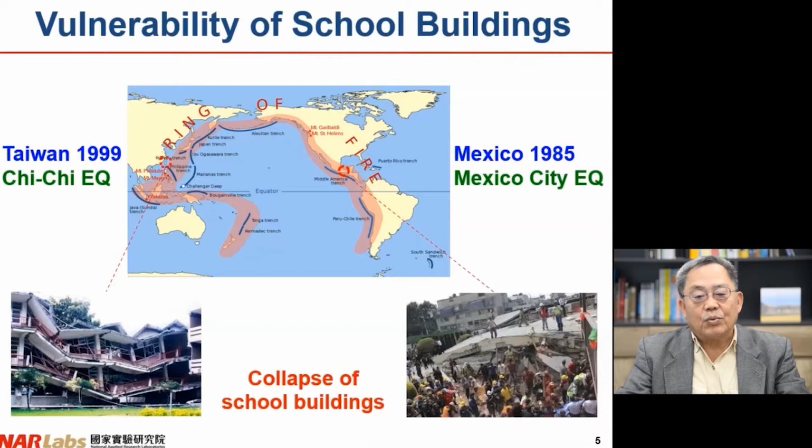So for introduction, as you can see, Mexico and Taiwan are all located in the Ring of Fire. We have big earthquakes, but our schools are quite vulnerable. During earthquake reconnaissance, you can see that we have collapsed school buildings. That's very dangerous, and we have to do something to prevent this tragedy. In Mexico, I believe you already have a very good technology. For example, you can retrofit the school building using post-tension rods. That's a very attractive technology, and therefore we cooperated with Professor Alcocer in the year 2007.

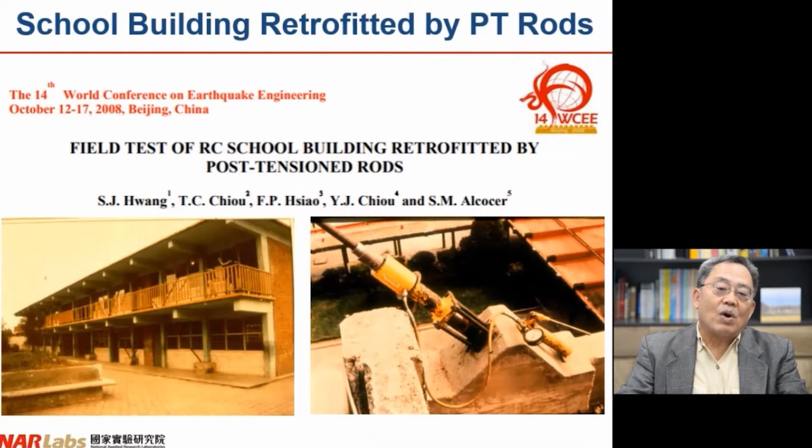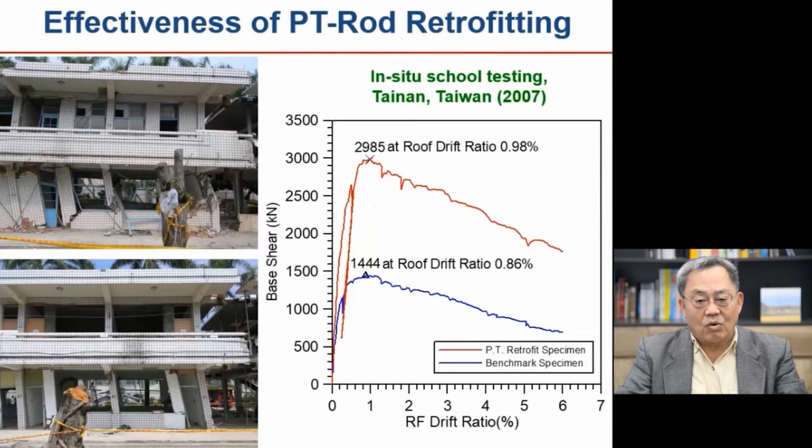So in Taiwan, we have in situ school testing in Tainan, and we have 2 building units. One without retrofitting, here is the curve in blue, but if we retrofit using the post-tension rod, you can see that the strength can be greatly enhanced. So this is a very advanced technology, and I think that Taiwan and Mexico have a strong tie in the long run. So let me introduce the evaluation and retrofitting technology that we have.

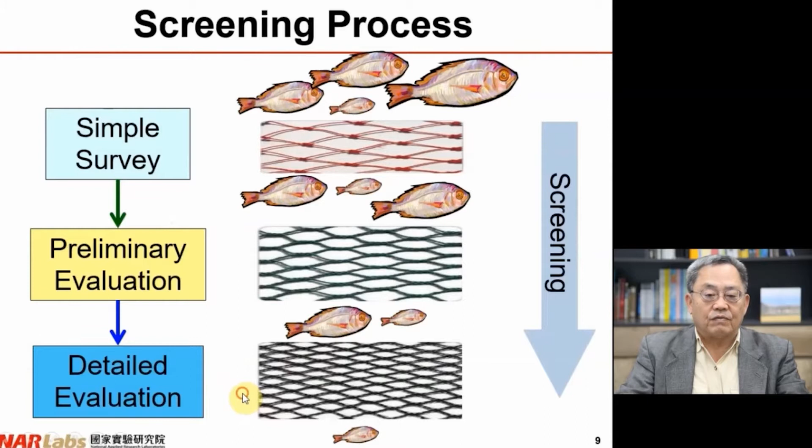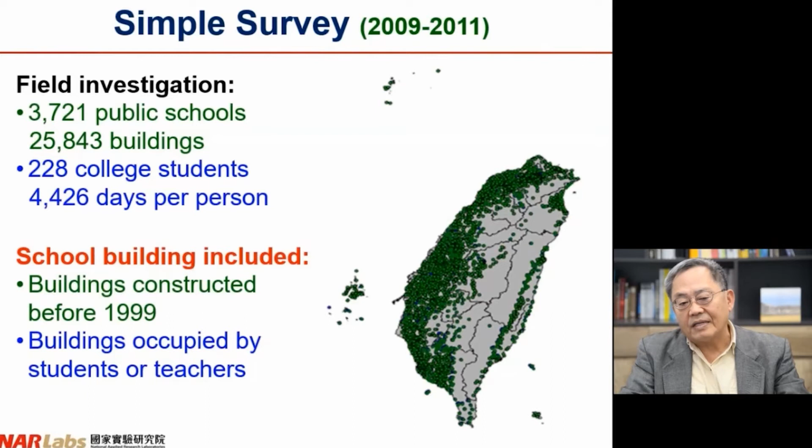Since we have a large volume of schools, we need a screening process. We begin with a simple survey using a very coarse mesh, followed by preliminary evaluation, and then we use the most refined mesh, that's the detailed evaluation, to find the dangerous school buildings for retrofitting. For the simple survey, we invite college students to do a field investigation during the summer and winter vacations. They stop at each site to see all the school buildings. A school building should be included in this project if it was constructed before 1999 and is occupied by students and teachers. Those are the buildings we need to pay special attention to.

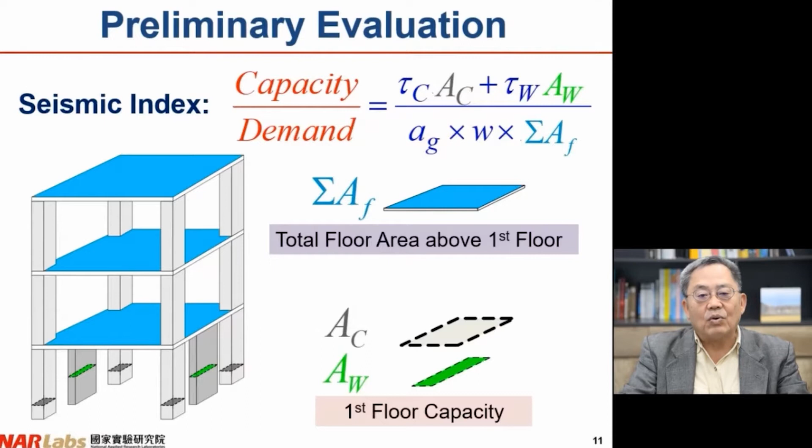For preliminary evaluation, we use the seismic index, that's a capacity to demand ratio. For capacity, we use the column area in the first story times the average column strength, and we also include the first story wall strength. As for demand, we use the site acceleration times the mass. Therefore, we can have a simple index to indicate the priority.

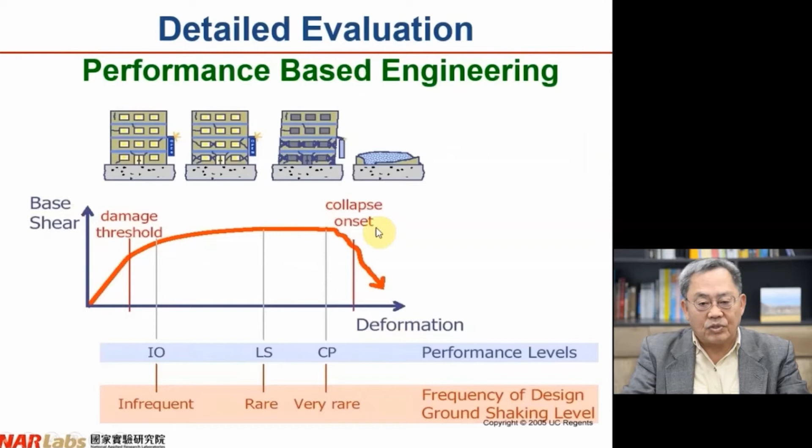And for detailed evaluation, we would like to use performance-based engineering. It means that we have to handle the base shear as well as the lateral deformation. Since we know the deformation, we can understand the damage status more closely. So for this detailed evaluation, we use nonlinear static analysis technology. So we developed the pushover analysis.

First, we find out the capacity curve, that's the base shear versus roof displacement. And then we convert it into a capacity spectrum using the single degree inverted pendulum. Then by defining the performance point, we can get the performance target ground acceleration, AP. Once we have this value, we can compare it with the code-specified value to see whether or not it's qualified.

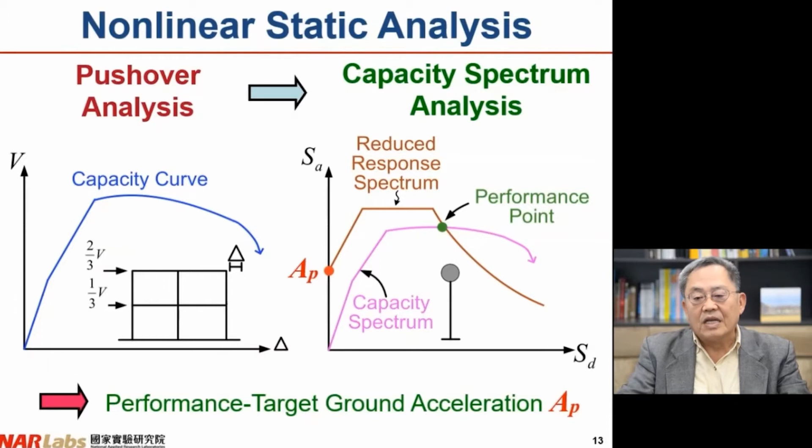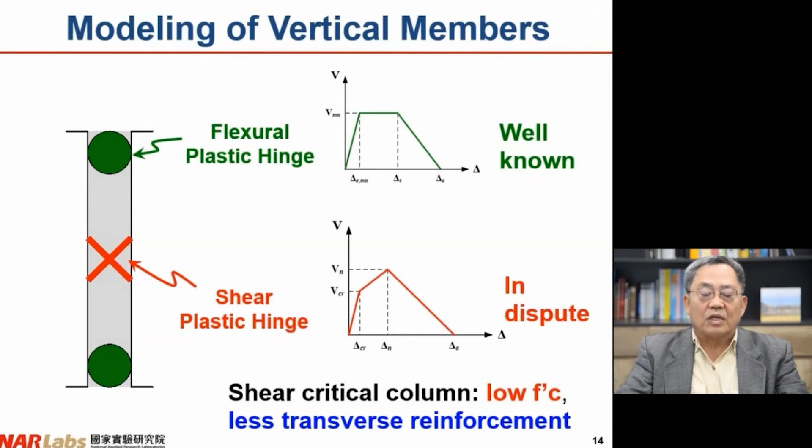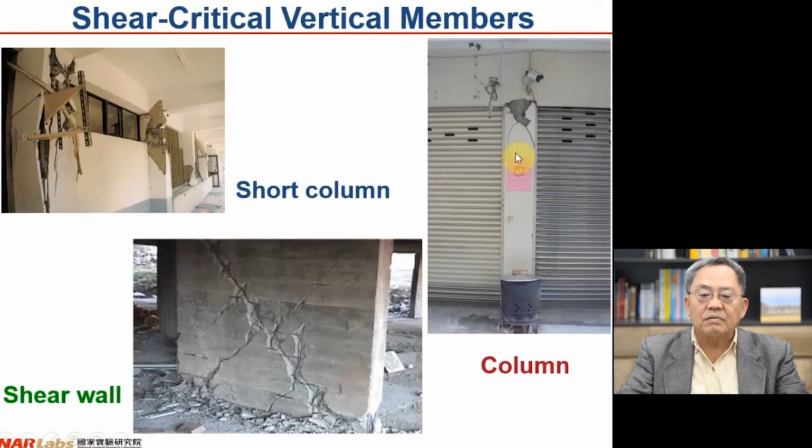But in Taiwan, since our concrete strength is very low, and also most of the school buildings were constructed before the seismic code was available, the school buildings have less transverse reinforcement. So low concrete strength and less transverse reinforcement make all the columns shear critical columns. So we have to resolve the shear behavior before we can use our analytical method. In the reconnaissance in Taiwan, you can see that we have a lot of column failures for short columns, typical columns, and also shear walls subject to shear failure.

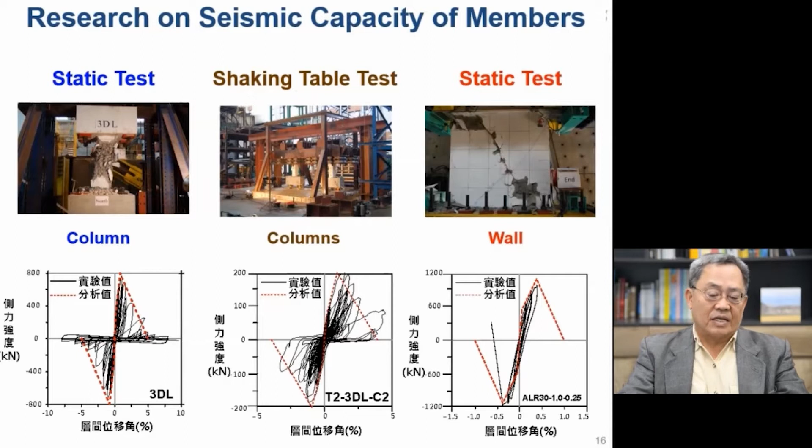So in NCREE, we have a lot of research on the seismic capacity of the members. We use static tests on the strong floor. We also use shaking table tests for the columns as well as the walls. Most important is that we have the measured curves, and we use them to calibrate our analytical model. So for member-wise, that's the way we do it.

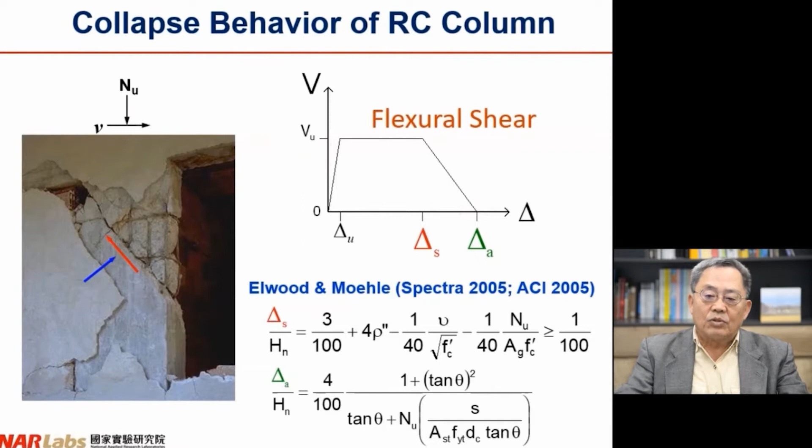For flexure-shear behavior, most important is the collapse, and how to define it. As shown in the left photo, you can see a major shear crack occurs. That's a shear failure that occurred at the lateral displacement of delta S. But at that time, the vertical load, NU, can still be maintained. Unless you have a larger lateral displacement, delta A, and we lose the gravity load carrying capacity, that's a collapse. This model was developed by Elwood and Moehle in the year 2005. They are empirical equations, but very useful. So we include this model in our analytical procedure.

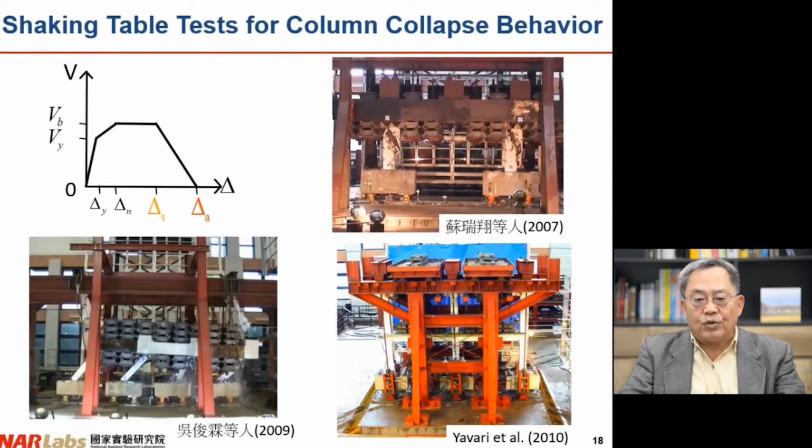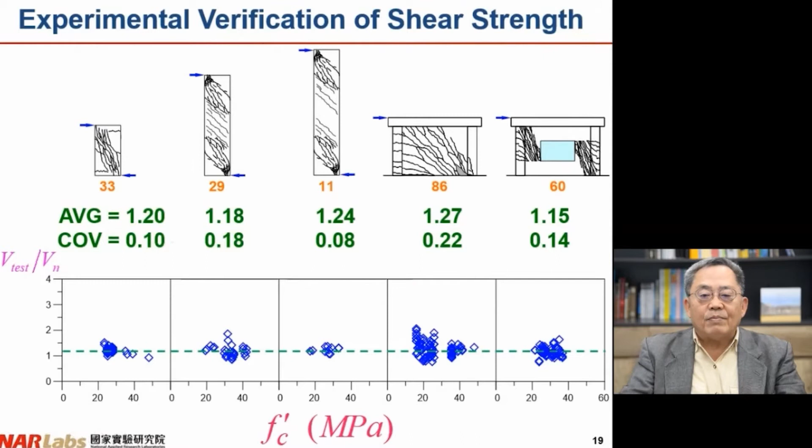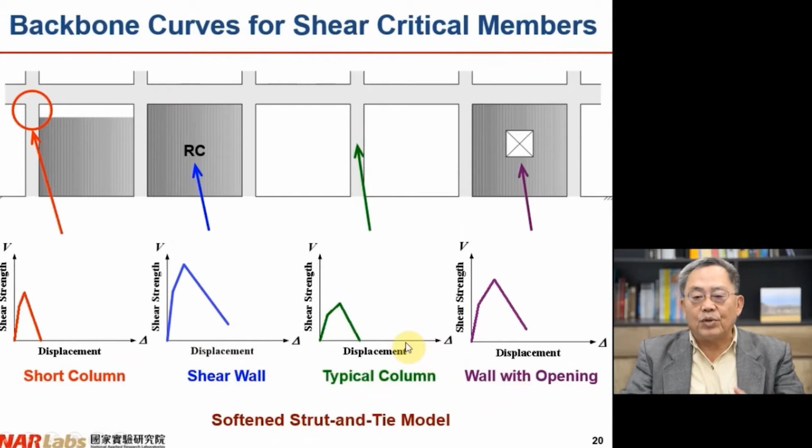So after we establish our member behavior, we try to find out the backbone curve for these shear critical members, such as short columns, shear walls, typical columns, and walls with openings. Once we have this lateral load-deflection curve, we can perform our pushover analysis. And then we shift to in-situ school tests.

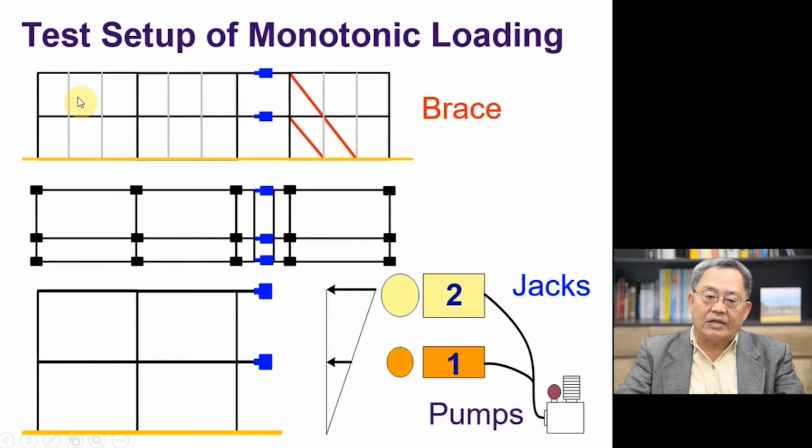Every year in Taiwan, some school buildings are going to be demolished, and then we can perform the test. How to do it? The school building is rectangular in shape, so let's cut it in half. Then we use braces to retrofit the other part as a reaction frame. Then we put the jack in between and jack it, and the weak part becomes the specimen, and we can measure the lateral behavior. Let me show you one example of the pushover test.

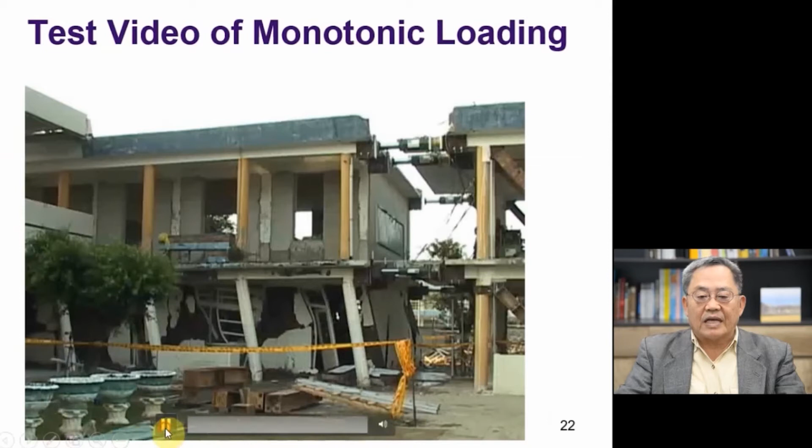Here is the monotonic loading. We push to the very last, and we can see the total collapse of this building. And then we can understand more about the behavior.

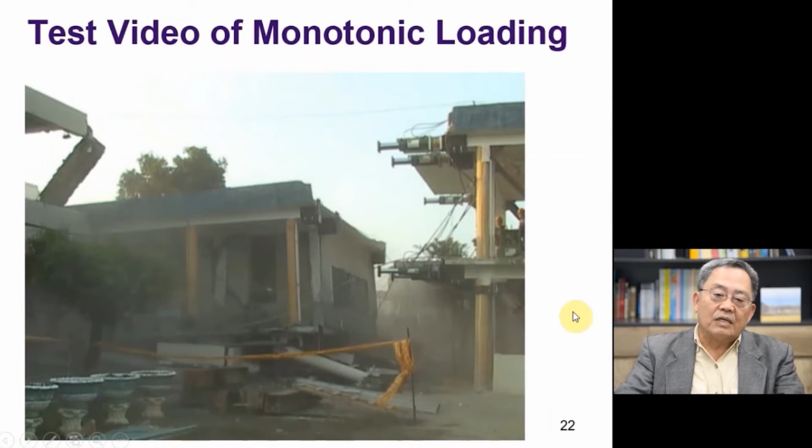And we also perform the pseudodynamic and the cyclic loading test because we want to model more closely the earthquake motion. So for this kind of test, we need the RC reaction wall. So we have to build our own reaction wall. And we use the oil jack actuator from MTS, and we use the post-tension rod. Therefore, we can push and pull back, and we must have a very strong measuring frame to indicate the displacement.

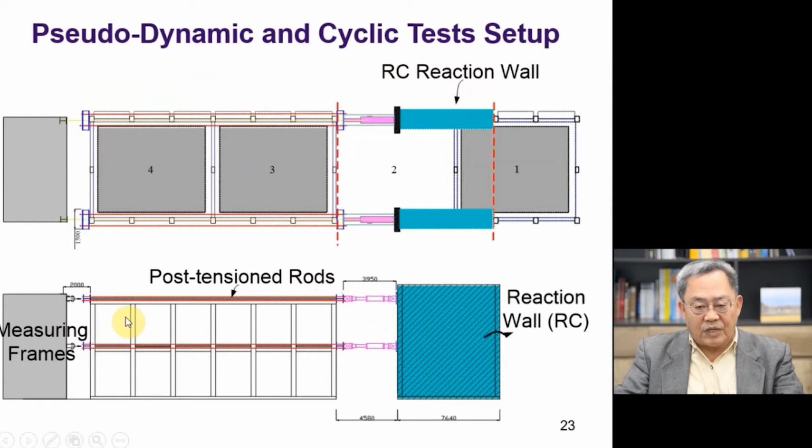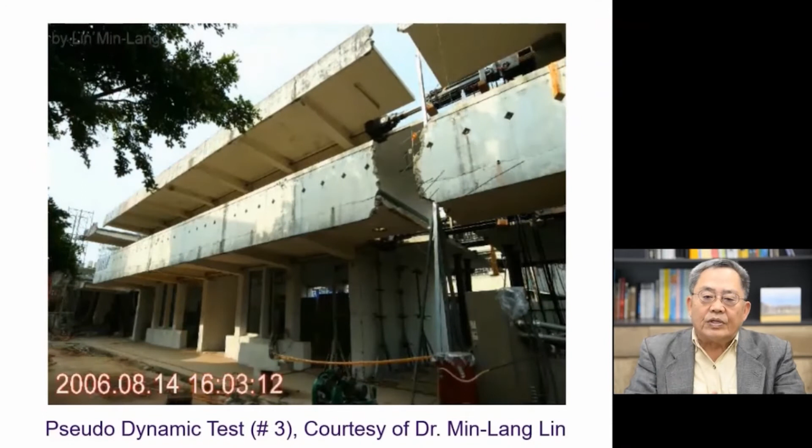So here is an example. That's a pseudo-dynamic test we performed in the year 2006. So you can see that we can indeed input earthquake motion and measure the building response.

So in the year 2005 up to 2007, we have four school sites. We perform the in-situ school testing. So you can see that we have the static pushover test. So we have the measured curve compared with the analytical model. We also have the pseudodynamic test followed by the cyclic loading test to really understand the deformation capacity of our building specimen.

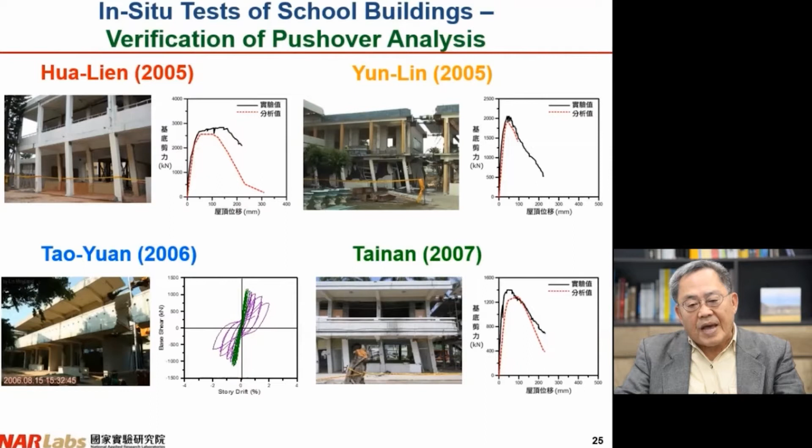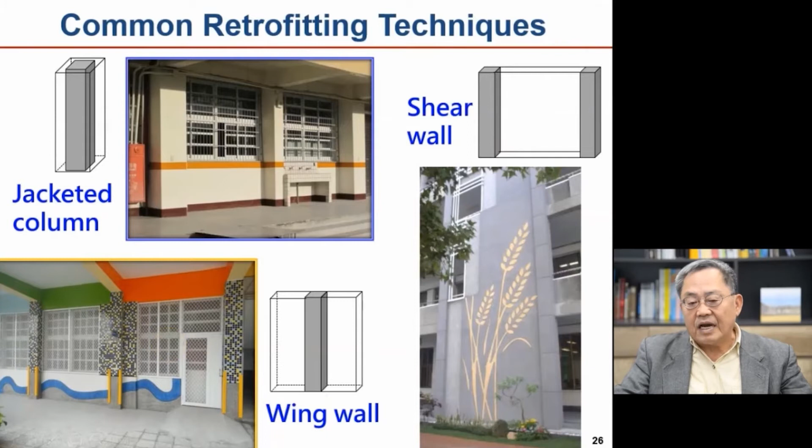As for the retrofitting, the common retrofitting technology we use is the jacketing of the column. So showing an example here. And we also use the infill RC shear wall, and you can do that in this way, with some architectural design. And we also use the wing wall. The wing wall shown here is two pieces of small wall beside the column. But in this way, we can keep the ventilation as well as the light of the school classroom.

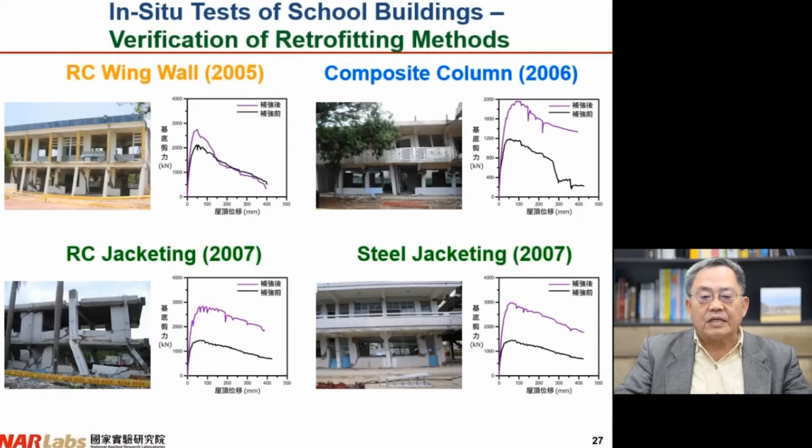So for all these retrofitting procedures, we use the in-situ test to verify our retrofitting method. So RC jacketing as an example, you can see that without retrofitting is the curve in black, but when we retrofit using the RC jacketing, you can see the curve in purple, and the strength is greatly enhanced. So all the retrofitting methods were verified in this way.

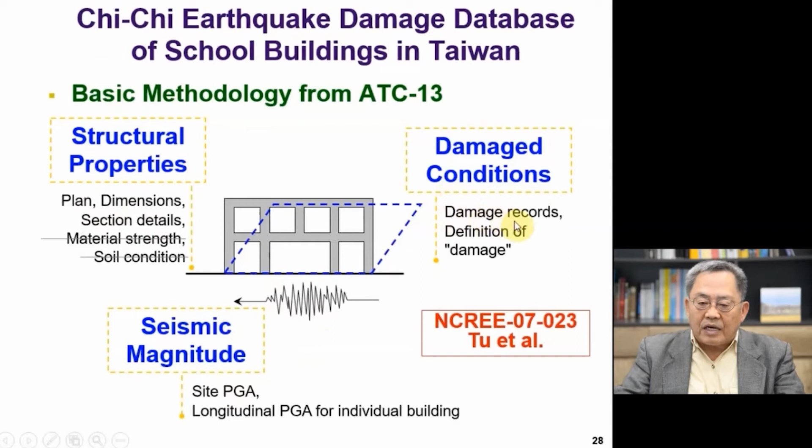But before we announce to our engineers, we also use the database to check it. So we use the Chi-Chi earthquake damage database of the school buildings in Taiwan. So these school buildings must have the structural property and contain the plan, dimension, section detail. We also have the major seismic magnitude, so it means the site PGA was measured. But we also have the damage condition report. So we have the damage record, and we have the definition of the damage. So we have totally 35 buildings containing this information, and we use that to check our analytical model.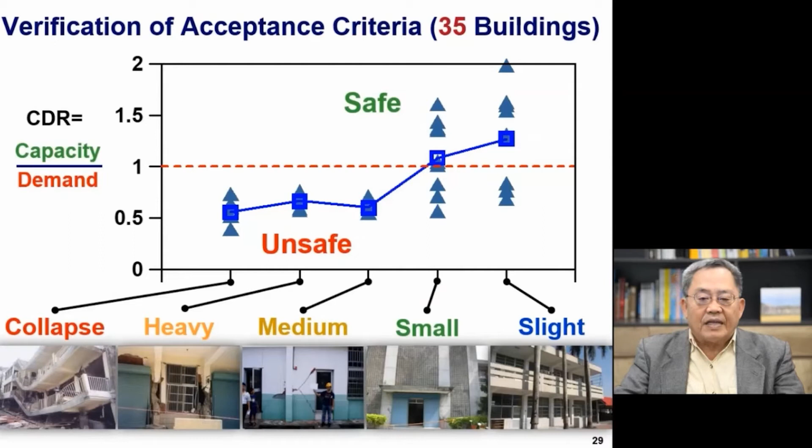Okay, let me introduce the school retrofitting program to you. So first, we have a strategy for the school upgrading in Taiwan. We start with the census. That's a field investigation, as I just mentioned, followed by evaluation. So we have preliminary evaluation, and if it indicates unsafe, then we go through the detailed evaluation. For detailed evaluation, we have the peer review, and then if unsafe, we can go to design and construction. So we can have either rebuild or retrofitting. So for retrofitting design, we also have the peer review, and for the retrofit construction, we have the inspection.

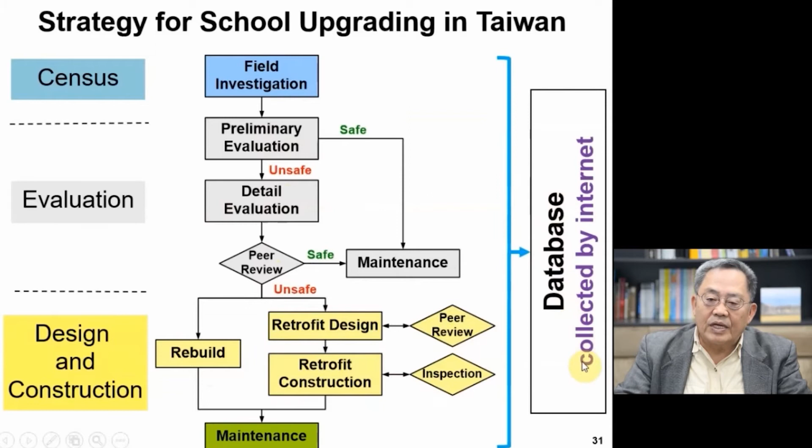And all the process, we collect into the database. So we collect it through the internet, so then we have all the data. So it is very important to unify the process, because in this school retrofitting project, we have very complex parties. We have governmental officers, we have school teachers, we have engineers, we have constructors, we have students and the parents. So they have diverse opinions, and that's the reason why unification is very important. And besides, we have a very tight schedule. So we have an annual budget that should be checked annually.

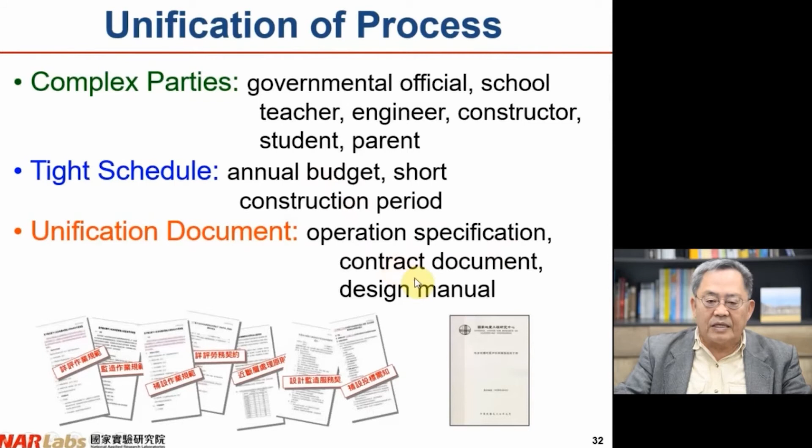And the construction period is very short, either in the summer vacation for 2 months or in the winter vacation for 1.5 months. And so therefore, we provide a unification document. So we have operation specification for all the process, for the detailed evaluation, preliminary evaluation, seismic retrofitting. And we also have the contract document. And most important, we provide the design manual for school building.

And worth mentioning is that for budget control, it means how to pay the service payment. So for new construction, we all understand we use the design payment equal the rate times the construction fee. And therefore, the payment is based on the quantity. But if we introduce this method for retrofitting, we can see that a lot of unnecessary retrofitting will be performed.

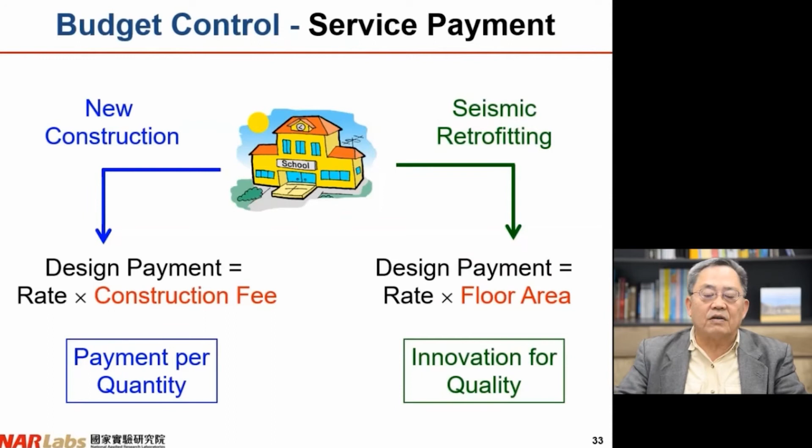So therefore, we change. For seismic retrofitting, our design payment equals the rate times the floor area. So once you know the floor area, then we'll give you the certain amount for your design fee. And therefore, this tries to encourage the innovation for quality. So I think this is a very important procedure.

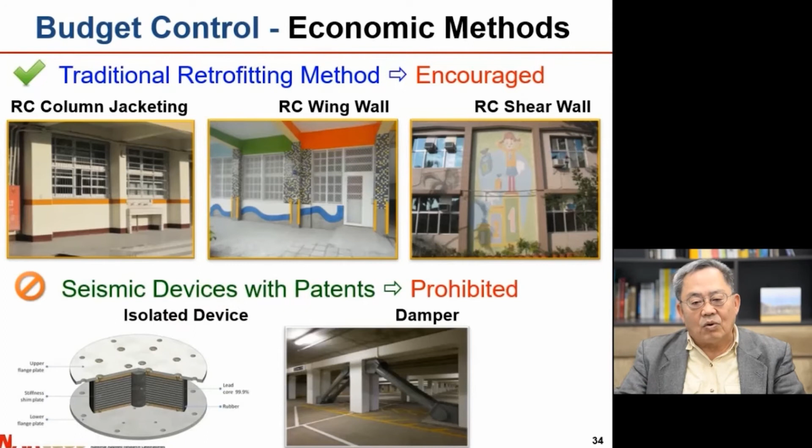And also for budget control, we recommend using the economical method, because traditional retrofitting method is encouraged. It means RC jacketing, RC wing wall, or RC shear wall. And because the school buildings in Taiwan are all low-rise RC buildings, this traditional retrofitting method is very cheap and very effective to increase the strength, and is good enough. And therefore, if you talk about seismic devices with a patent, it was prohibited. So we don't use the isolation device or the damper for our school retrofitting project.

And also for quality control, review and inspection is very important. So for the peer review design, we have 3 reviewers for each design case, and of these 3 reviewers, one must be a school professor, at least 1 engineer. So then we have 3 reviewers in the committee. In the meantime, we also invite the school staff, because maybe the teacher or the principal have to show their willingness for this project, what their expectations that should be included. And then through this peer review, we can see that the budget can be saved.

And also, during the construction, we must have the inspection. So usually inspection was carried out by the contractor and the engineer. But in this project, we introduced the school teacher to be included. So they have to take the photo and upload it to the NCREE website to see at the critical point how the process is going.

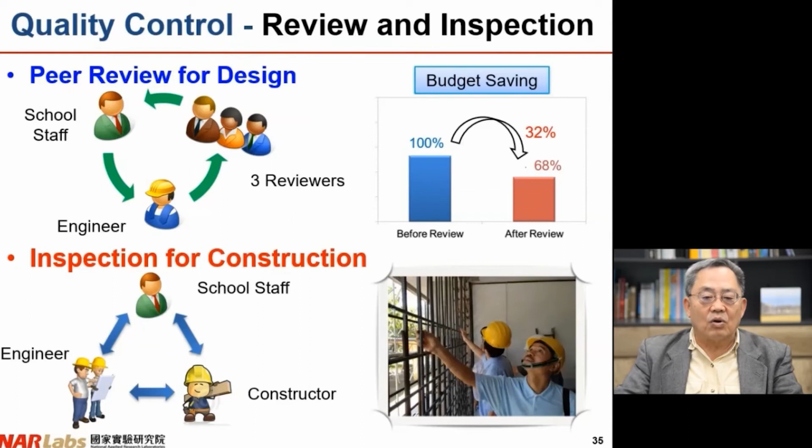And very important is the workshop, because engineer, school administration, and the educational officer must have the workshop to indicate what's the process. Especially for each school, the teachers change every year. So we have a new teacher in charge of the school retrofitting project, and therefore the workshop is the only way we train the teacher to understand the process. So we also show a very good case study. So if we have a good example, then we arrange the workshop and invite the administrator or the engineer to take a look, and we can learn from this excellent project.

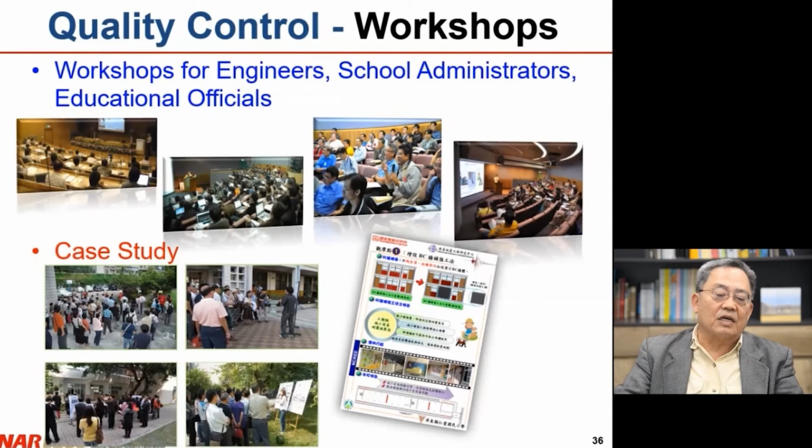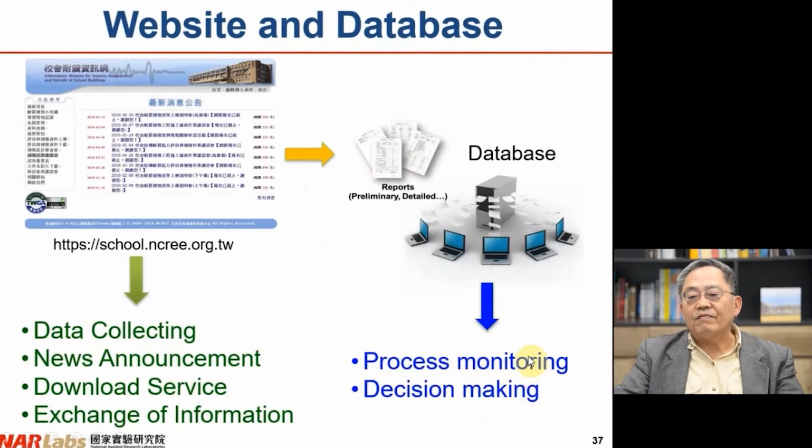And more important is we use the website and the database. So we have a database in NCREE. So in this database, we use the data collecting, we can announce the news, engineers can download the service, and they can exchange the information. So they provide all kinds of service. But we can also use the data and analyze them, and therefore we can understand the process, monitoring, and also we can provide good information for decision making.

So this retrofit indeed is quite effective. So in the year 2010, we had the Jiashian earthquake, with a magnitude of 6.4. So we have two schools side by side, away from the epicenter about 30 kilometers. So you can see that one school without retrofitting had severe damage. But the other school completed the retrofitting, so no damage at all. So that's a good example indicating the effectiveness of the school retrofitting.

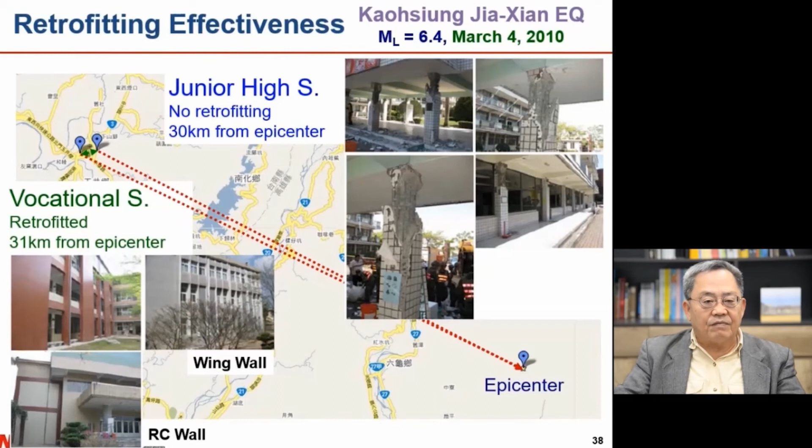So talk about the cost. If you can control the cost, it is very important to make the project go long. And then our statistics show that our actual cost for retrofitting compared with the rebuild fee is only about 10%. So that's about 1,000 cases.

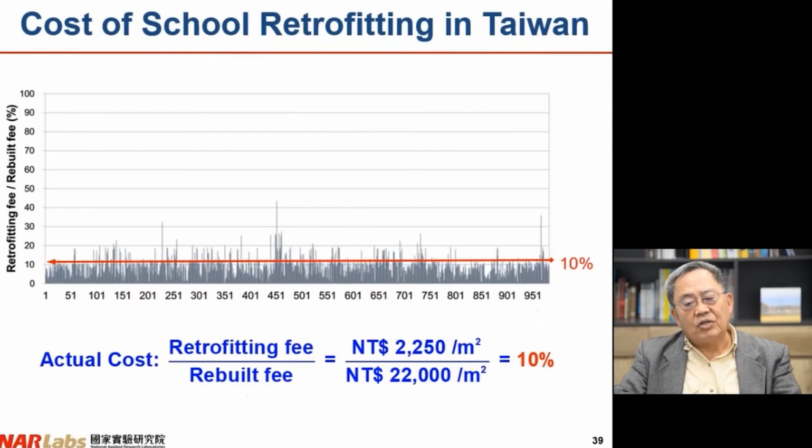So try to lower down your retrofitting costs. Make sure this project can go for a long time. And the current process that we have, this project started from 2009 and will be ended in 2022, so in total a span of 14 years.

So you can see that we have our census of about 27,000 school buildings, and they go through evaluation and through the seismic design, so they can rebuild or they can retrofit. And in total we have already completed about 9,000 of our school buildings. So up to the year 2022, of all the school buildings in Taiwan, about 37% will either use retrofitting or rebuilding to upgrade their seismic capacity.

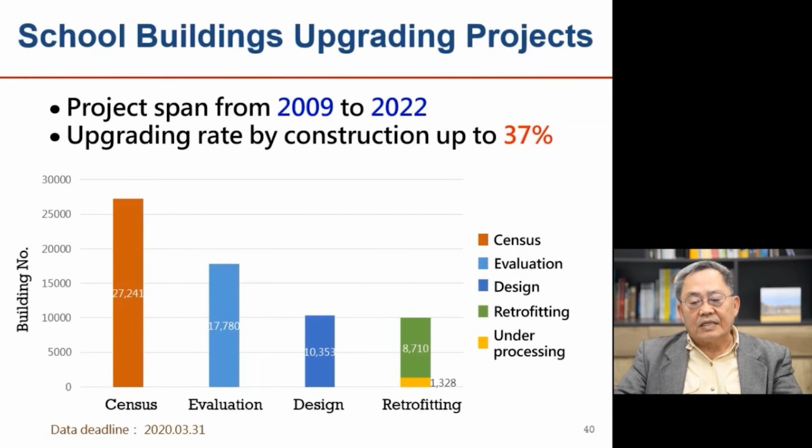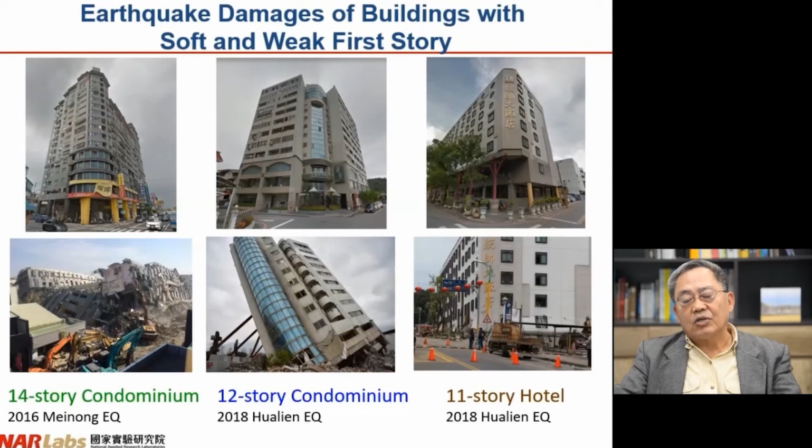So let me talk about the new program at the initial phase, that's a residential building program. In Taiwan, we have mixed-use urban planning. So you can see that a building maybe in the first story is for commercial use, but the upper story is for residential purposes. During the earthquake, we found out that the first story with the open space results in a soft and weak first story. So during the earthquake, they collapse. There are a lot of cases. So in Taiwan, it's also an urgent need to resolve this problem.

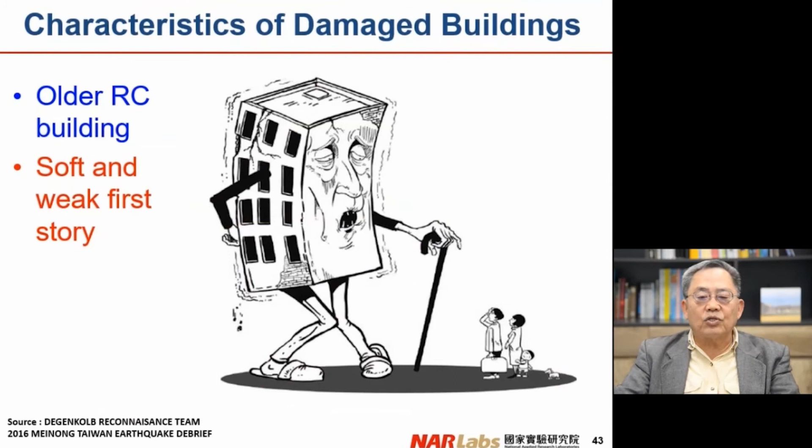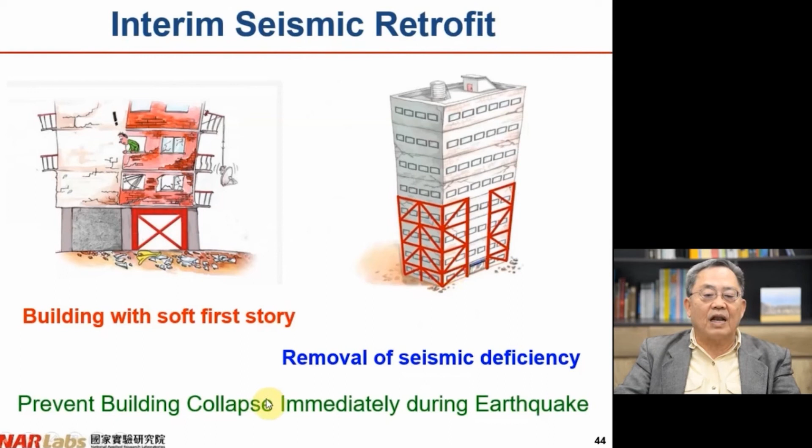So for the characteristics of all the damaged buildings we observed, they are older RC buildings, meaning the building was constructed before the Chi-Chi earthquake, and they also have a soft and weak first story. So we want to solve this kind of problem. How to do that? Because the volume is too large, the budget we cannot afford. So we determined a strategy: for buildings with a soft first story, we simply remove this seismic deficiency by retrofitting the first story, using either a brace, shear wall, or an external frame, to prevent the building from collapsing immediately during the earthquake.

So let me show you one example. That's an interim retrofitting case. We use the external frame. Shown on the left here is a 7-story condominium, but the first story is a market. So what we do is introduce the addition of the external frame. By introducing the external frame, we simply upgrade and remove the seismic deficiency of the soft and weak story. During the construction, this market still operates. So I think that's the way to do it in a much smoother and simpler manner.

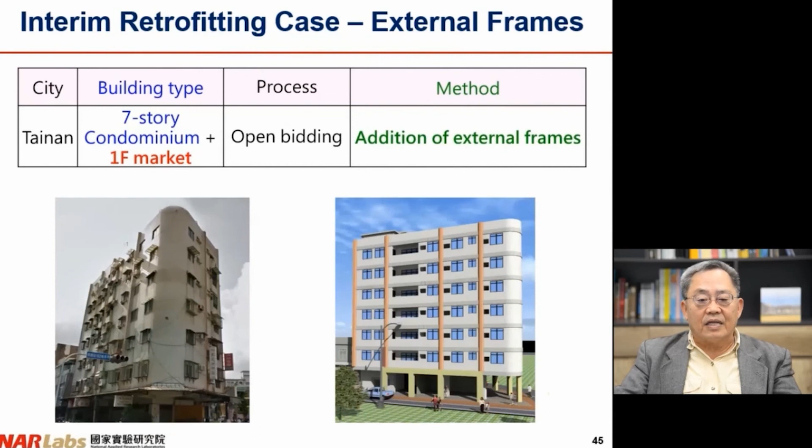So let me draw my conclusion. For the school retrofitting project in Taiwan, the major feature of this project, as I see it, is first, it is compulsory. We used a survey investigation, and the older schools and older buildings were carefully examined to make sure whether they should be included in the project or not. And technology-wise, we use advanced evaluation methods. We use nonlinear static analysis, and we have a screening process, so we can determine the prioritization carefully.

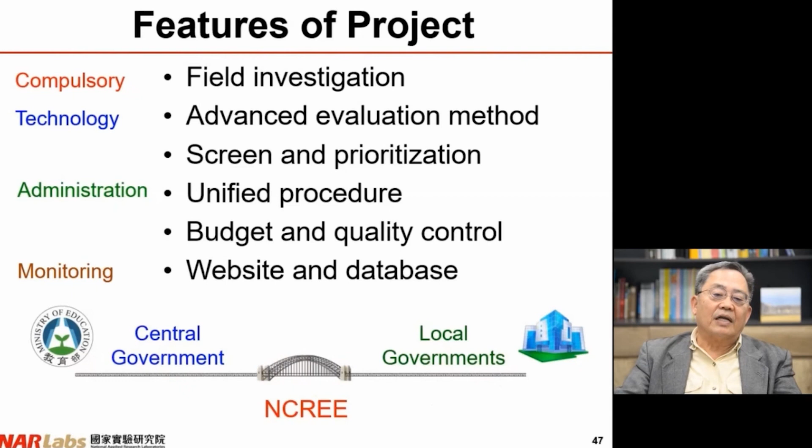And for administration, we provide a unified procedure, and the budget and quality control were carefully designed. And for monitoring, we are using the website and the database. For the school retrofitting project, the budget was provided by the central government, but all the schools belong to the local government. So NCREE as a platform tries to bridge the central government and the local government to carry out this project in a much more reasonable manner.